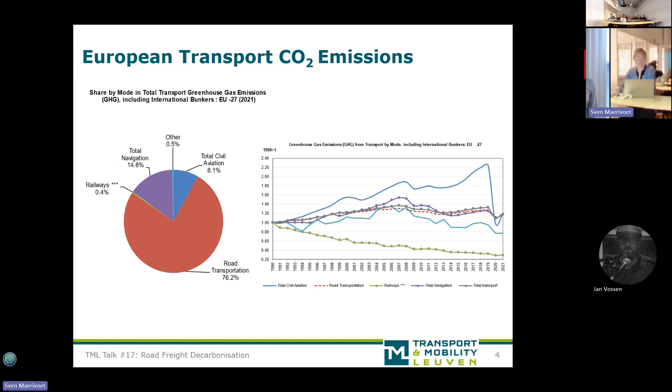What's going on policy-wise? The European Commission is trying to address the issue of mitigating climate change by implementing several policies, including one that was implemented in 2019, a heavy-duty vehicle CO2 regulation. Essentially, vehicles are being certified using a specific tool, the vehicle emission, vehicle energy consumption tool, Vecto. This regulation was only implemented in 2019, and actually there's already an update being proposed.

The initial targets were to reduce greenhouse gas emissions by 15% by 2025 and 30% by 2030. In light of new goals, and energy independency, they're already considering that revision, and it's going to be a lot more strict.

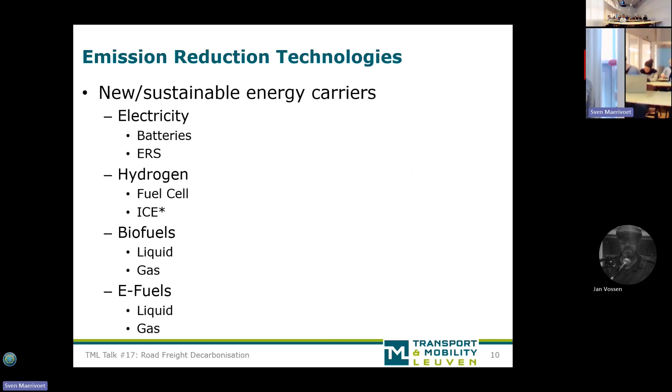What's the advantages of these battery electric vehicles? One, they're efficient. Electric engines are a lot more efficient than internal combustion engines. 70 to 80% of the primary available energy is transferred to the wheels. They're quiet, electric motors, there's very few moving parts. These engines are very quiet, which helps both the environment and the driver. There's no tailpipe emissions.

There's no fuel being combusted, so there's nothing coming out of the vehicle. And it's a relatively young technology. It's still improving. So there are vehicles on the market, but there's still quite a lot of potential to be had in improving the vehicles.

What are the downsides? These vehicles are heavy. Well, specifically the batteries are heavy. At this moment, they're heavy if they want to achieve the same operational profile as current diesel vehicles. If you want to drive them for a full day, that's around 800 kilometers. In order to achieve that, you need a battery that's around 1,000 kilowatt hours. Such a battery at current energy densities will weigh around 5.5 tons. That cuts into payloads, has an impact on the infrastructure, creates more road damage. So that's a difficult position these vehicles are in.

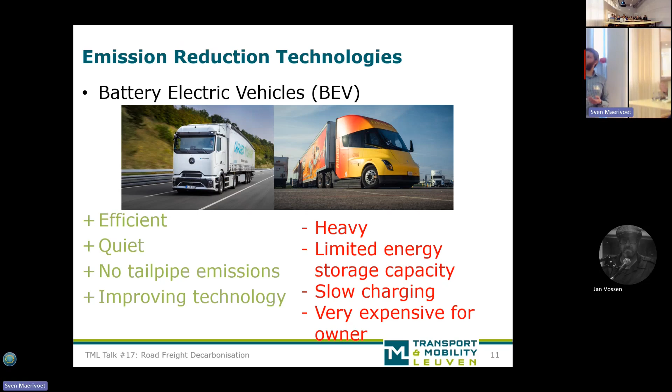Next, you have electric road systems, and there I'm already moving towards the next presentation a bit. Essentially, they have a lot of the same upsides as battery electric vehicles, in the sense that they're efficient, they're quiet, they just get their energy from the overhead power lines or from the road. There's two systems. On the left, you see one with a pantograph that needs to be installed on the vehicle. It costs about 25,000 euros to install such a system, and then it takes the energy from those power lines directly to the vehicle itself.

That means, if they're combined with a battery electric vehicle, the battery can be a lot smaller. You don't need as much. It doesn't cut into the payload as much, and it's a lot less expensive to buy such a vehicle. You can also combine it with diesel vehicles. These vehicles are actually actively being tested combined with diesel propulsion systems. So they are multi-compatible, as you would say.

What are the downsides? Of course, this needs to be installed on the road. Such a system with overhead lines costs around 1.7 to 2 million per kilometer to install on a highway. So that's expensive. Those costs need to be recovered in order to make the system economically viable. These systems are still being tested. There are trajectories in Germany and Sweden where they are actively being tested, but the reliability in all kinds of different weather circumstances is not yet proven. That's a work in progress, I would say. Doesn't mean that it's necessarily a problem, but it still needs to be tested.

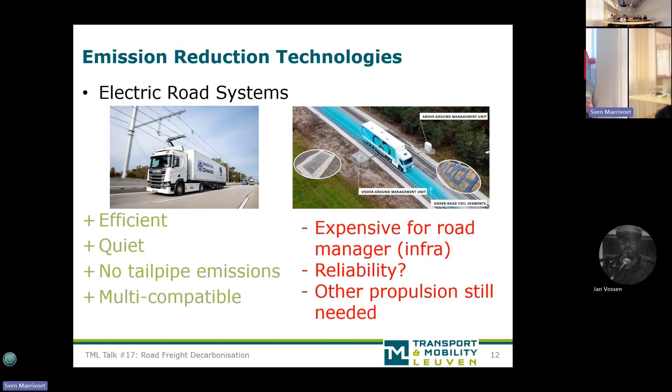And of course, you do still need these vehicles to be equipped with other propulsion systems, because you're not driving on a road with overhead cables the entire time. It does need either a battery to drive its electromotor or a diesel engine for the last mile, or to overtake, or in case a part of the charging network is not available.

Next, we go to hydrogen fuel cell. It's essentially an electromotor powered by electric energy stored in hydrogen rather than in a battery. So it's quiet, has no tailpipe emissions, and because of the much higher energy storage capacity of hydrogen, has a much longer range than battery electric vehicles.

Downsides, it's expensive. It's not as expensive as a battery electric vehicle, but still it costs quite a bit. The main downside is its energy inefficiency, I would say. As I said, a battery electric truck converts about 70% of its primary energy to power on the wheels. For hydrogen, it's around 30%. That's worse than an internal combustion engine, simply because there are so many energy conversions going on.

The primary energy needs to be converted to hydrogen, then converted back to electricity in the fuel cell, and only then can it start being used. So those are very inefficient processes that waste a lot of energy, and essentially you need 3 times as much electric energy and electric generation capacity to power these vehicles. So if one windmill is enough for a certain amount of trucks, you need three windmills to power the same amount of hydrogen vehicles.

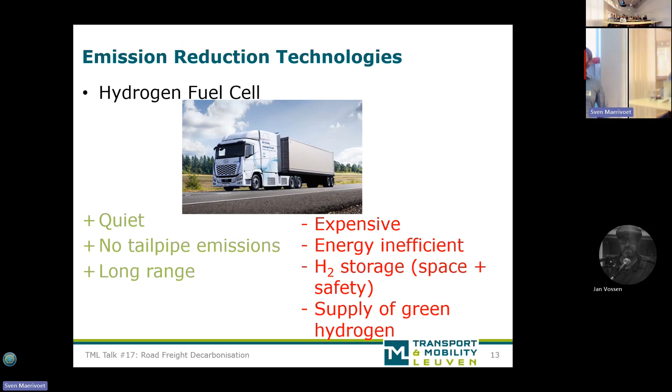And then, the supply of green hydrogen. Hydrogen can be supplied, but it's mostly done using fossil fuel as a starting point. The capacity for green hydrogen using green electricity is still very, very limited, and it remains to be seen whether there can be sufficient green hydrogen made available for an energy intensive sector such as freight transport.

Moving on to biofuels. Hydrogenated vegetable oil, biological natural gas, for example. These are essentially already available. So you do have vehicles using these fuels already. They can essentially be using the same vehicles that we have today, with certain adaptations maybe for older vehicles, but essentially this doesn't change anything. So you can use the same vehicles and you can use the same refueling infrastructure.

Downsides, well, the greenhouse gas reduction potential tends to vary, I would say. Past biofuels, in some cases, didn't reduce greenhouse gas emissions at all, considering the entire life cycle. These days, most modern biofuels do achieve greenhouse gas reductions of 50%, some even claim 90%. So there is some reduction, but you never get to net zero with these. They're more expensive to make. That's an important one. Again, as with hydrogen, is there enough organic material available to make these sustainable biofuels?

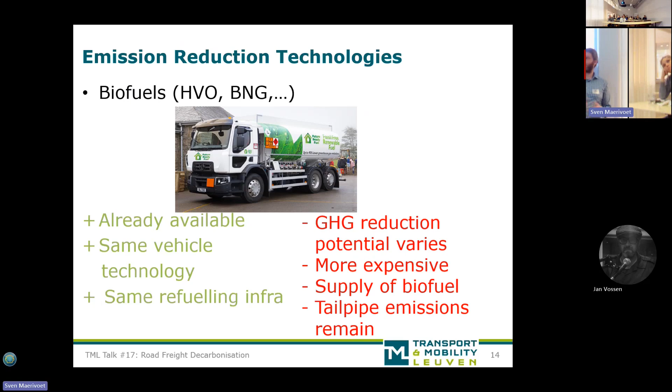And since you're still using combustion technology, you're still getting tailpipe emissions. So this is still producing NOx, this could still produce particulate matter, and that's not an issue you're solving with these.

And then e-fuels. I wasn't able to find a decent picture simply because they're still so very immature in terms of technological advance. What e-fuels are, essentially, they're synthetically recreating the fossil fuel we're using today in a more pure form, completely carbon neutral. So you use clean electricity to generate hydrogen, you take CO2 that you capture from the air, and then using additional electricity, you can make a completely carbon neutral fuel. That's the ideal situation, I would say.

Again, you're using the same vehicle technology, using the same refueling infrastructure. Problem is, this is very expensive. What they're projecting right now is that e-fuels would cost 2 to 3 times as much as classic fossil diesel. So that's going to cut into the bottom line of transport operators. It's a very young technology, so there are factories that produce e-fuels, but they're still very limited in scope, and their production capacity is still very low.

And the same downsides as biofuels: you're still using inefficient combustion with 40% thermal efficiency, and you still get all the same tailpipe emissions that you get with the diesel vehicles that you're using right now. That's the overview. That's what current technologies are to reduce carbon emissions, considering the prospects of the European Commission.

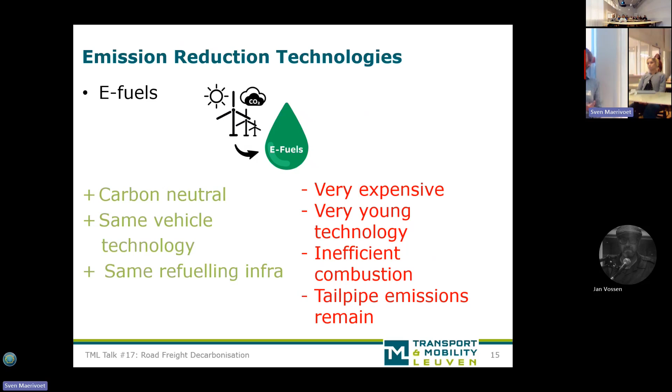So with that, I would like to conclude. Road transport is the largest European sector in which CO2 emissions are still increasing. So there's a great pressure to start getting those emissions down. Heavy freight demands high performance. So these are vehicles that are on the road a lot. They drive all the time. So you do need high performance vehicles in order to have an economically viable transport sector.

There are several reduction technologies that exist that I presented, but they are at various stages of development. So it remains to be seen which of these will be economically relevant by when. What the Commission is counting on right now are fuel cell electric vehicles, battery electric vehicles, and e-fuels. Some of these have serious downsides, and there's actually no clear solution yet. There's no way of telling right now what the optimal solution is going to be. Still a lot of technological development going on. So we're still a bit in a wait and see situation, depending on those innovations.

Considering also that it's becoming very urgent to take action and to actually get things going in line of meeting the carbon emission goals. Yeah, no clear solution yet. But maybe we're going to hear about a good solution, a clear solution, in the next presentation.

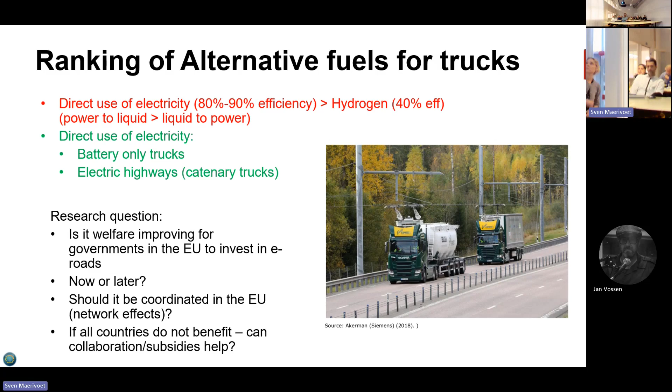Basically, I don't really have to say this because Tim was already saying this, but just a short repetition here. So the good thing with the battery trucks is that they have big batteries. So the days when they don't make these long trips, they can actually be used for vehicle to grid. So they can supply the network with electricity in daytime when electricity is more expensive, and charge during the night. And you also don't have these coordination issues. So they are sort of self-sustaining.

But then, as Tim was saying, they have this large battery, which takes up part of the payload capacity. And if it has to charge en route, that will take time. It will also be very costly, because they need contracts with these charging points. Also, it's very expensive for these firms to have drivers standing there waiting in the middle of the day, not driving. So that's going to be a large cost.

Whereas the e-road trucks, they have smaller batteries, so not that heavy, not that costly. And also they don't need recharging stops. But the problem is that this is going to be a large cost for the governments in investments, and how large, we can discuss; it's uncertain.

And then the big uncertainty these governments face now is that we don't know what the battery cost will be in the future. We don't know what the battery weight or density will be in the future. There are predictions, but we don't really know. We also don't know what the investment cost of the electric road will be, and we don't know what it will cost to maintain, particularly not in Scandinavia or Northern Europe where you have heavy winters.

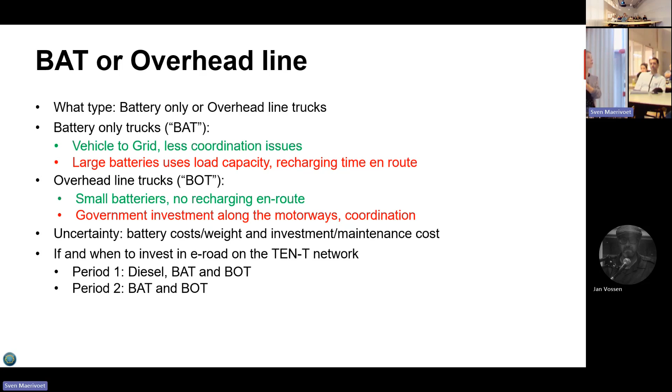So we set up this model, and now we think about the TEN-T network in Europe. So we think it's realistic, if it was electrified, that this is the network that would be electrified. And we have period one, say from now to 2035. That's if we're going to do it now, and then we assume we know the costs. Or we can say we do it in 2035, which would be period two. And in period two, we are not sure about the cost of investment, and we're not sure about the battery costs and weight. So that's the setup.

All right, so then we assume here that we have long trips and short trips. And the EU legislation says that one driver cannot drive longer than 9 hours per day. So we assume that the long trips are 9 hours. And these legislations also say that a driver can drive maximum 4.5 hours before that driver needs to take a rest of at least 30 minutes. So we say we have short trips, and they are 4.5 hours, and during that time we say the battery can last, and also there is not going to be any break because the driver can just drive.

And then we say each and every truck has a value X, and that is the share of days in a year that this truck makes a long distance trip. So we say every day the trucks make a trip, and X share of days during a year is long trips, and 1 minus X share of the days are short trips. So we have some trucks making a lot of long trips and some trucks making a lot of short trips, which is going to impact how the cost of the battery pays off.

So then this is the average yearly distance of the truck: the trip length of the short trips, the share of days making short trips, the trip length of the long trips, and the share of days it makes long trips. Then we have this battery, and we're going to optimize the battery size to determine what will be the optimal battery size for these trucks. And then we also say that we always need a 20% margin to take care of the battery. So we shouldn't be completely out of energy.

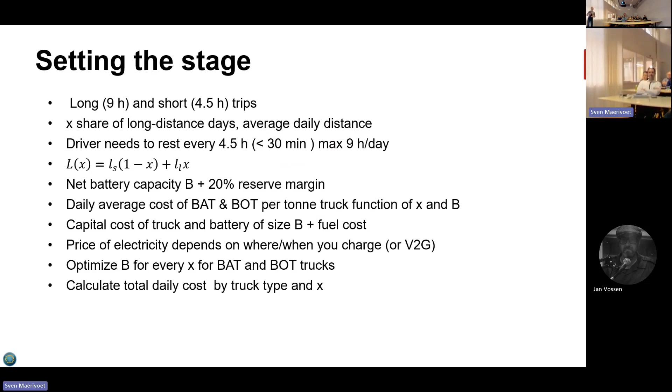All right. This is a key thing. The price of the electricity will vary depending on where you charge and also from whom. So it's always cheapest, we say, to charge at home at night. So that's one electricity price. And then if you can sell electricity to the grid, you're going to charge a higher price, because then you can do it at the moment when there is less electricity on the market for that hour. So that's going to be higher.

Then it's going to be even higher to charge while you're driving. Because as I said, these firms need to sign contracts with charging points so that they know they are not having drivers stuck waiting for capacity. And that's going to be costly. And then we have this electricity price when you're charging from the overhead lines. And there are several authors who made the assumption that the government is going to pay the investment, but they're going to charge 2 to 4% of the investment cost.

And that, they say, is going to be equal to the maintenance cost of these roads. If we go for that assumption, we have a pretty low price of electricity when you're charging from overhead lines. But it's also true that this price is going to be a lot smaller if you do this in a densely populated network, like Germany, where you have a lot of trucks that can share this maintenance cost, compared to, for instance, Sweden, where you have much fewer trucks to share this cost. So electricity prices charging from these overhead lines will be higher in Sweden than in Germany.

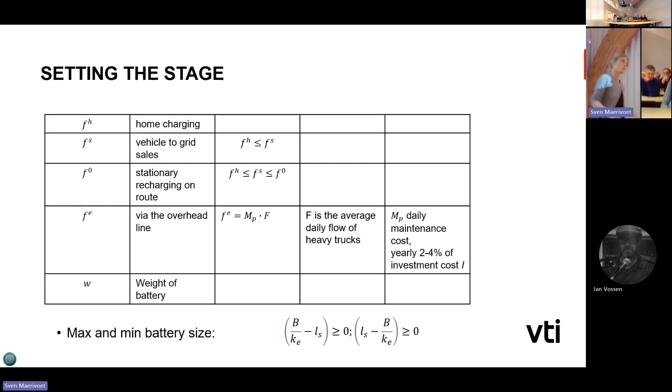Okay, so these are the equations. This is the daily cost. I will not go into these because it's a horrible equations when you're sitting in a nice lunch lecture like this. I'm just going to point out a few things.

First of all, this is the daily cost of the overhead line, the OLT truck. And this cost crucially will depend on the share of the network that is electrified, which in this equation is theta. So if you have a large network and if you're in international trips, it's going to be important that the other country also has the electric road. Otherwise this theta will be small because you cannot use the electric road in that other country. So that's going to play a big role.

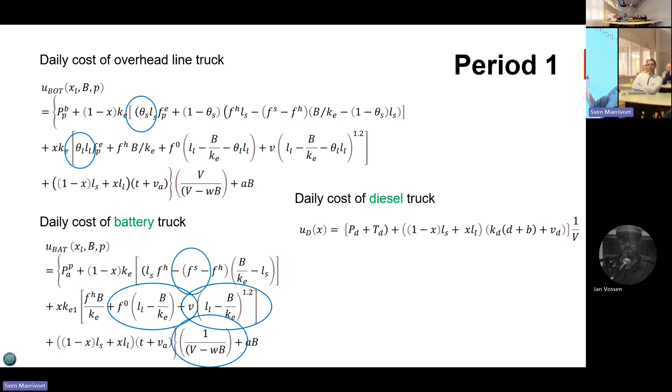And this is the cost of the battery truck. What's important here is that it will depend on the price of vehicle to grid, so what you can charge when you're not using your battery yourself but can sell the electricity. It will also depend on the size of the battery relative to the trip length. If you have a smaller battery, it means you will have to stop and charge, and that will be a costly time cost for the driver, who has to stand still and wait while the truck is charging. It's also going to be more expensive to charge because the electricity price on public charging will be larger. So this is kind of, and then we just have this old fashioned diesel.

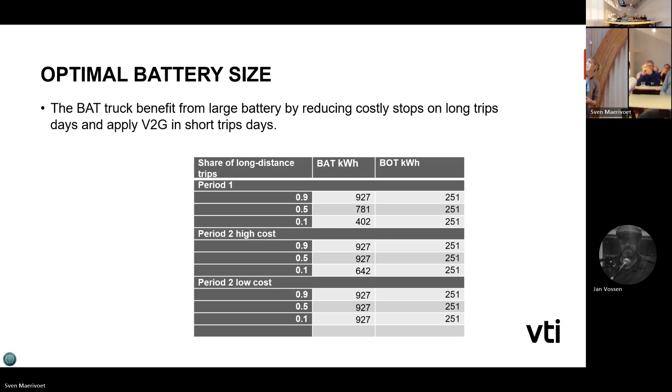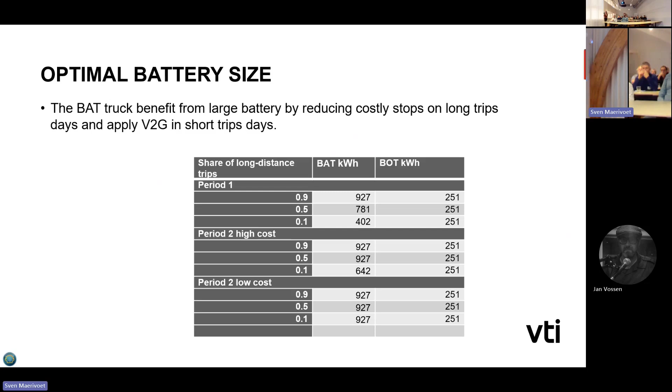All right, I think this is the results. This is first the optimal battery size. We see in the later period, when the batteries are cheaper, they will all go for the large battery, the battery trucks. Whereas the overhead line trucks will always go for smaller batteries, basically what they need just to cover the distance not covered by the overhead line network. But you see in the first period, it's only trucks making mostly long trips that will have large batteries, while trucks making a lot of short trips will have much smaller batteries, even though they can use the battery for vehicle to grid.

Here diesel is already so expensive because... Yeah, because of the fuel price. The fuel price. Because long distance trucks, as opposed to, for instance, cars or light trucks, use a lot of fuel. So this is basically why the diesel is expensive.

And this is already taking into account that the infrastructure has been built, or? Yes, so here we assume that the infrastructure is already built. And maybe this is why we don't see so many battery or overhead line trucks yet. It's maybe unreliable, but also they don't know for sure where to charge.

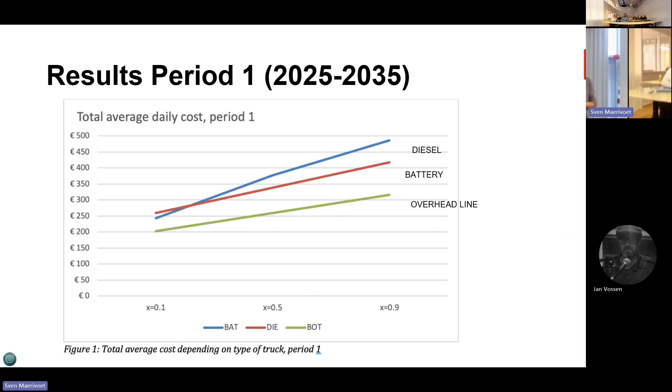And this is the result of period 2. In this period, as I said, we have 2 scenarios. One scenario is cheaper, lighter batteries, and higher investment and maintenance cost of the E-road. Then the opposite scenario, where battery cost and weight is higher, and the maintenance and investment cost of the E-road is lower. So those are the 2 extremes.

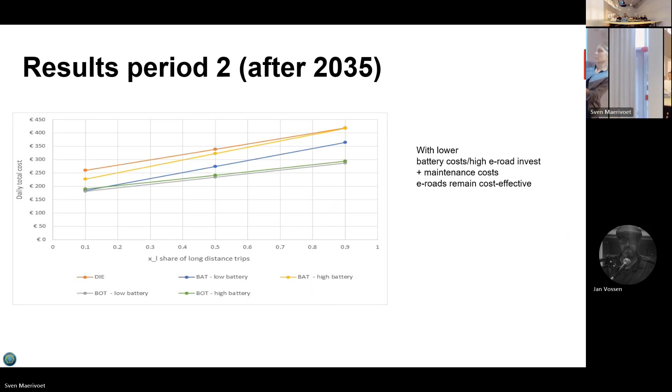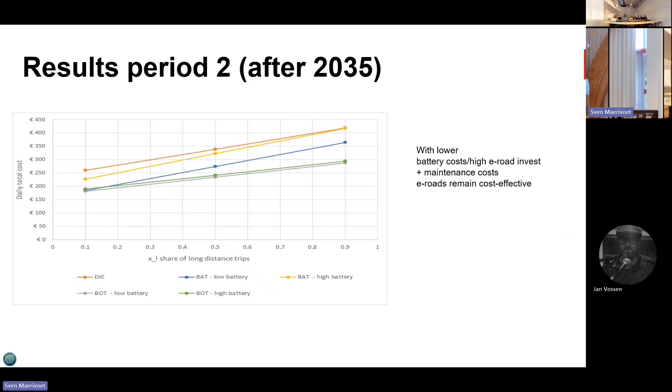And here you still see, in these green lines... this is the BOT truck, and you see it doesn't really matter whether the daily cost of the battery is high or low, because the batteries are so small. But it's still lower cost in both scenarios than in these battery-only trucks.

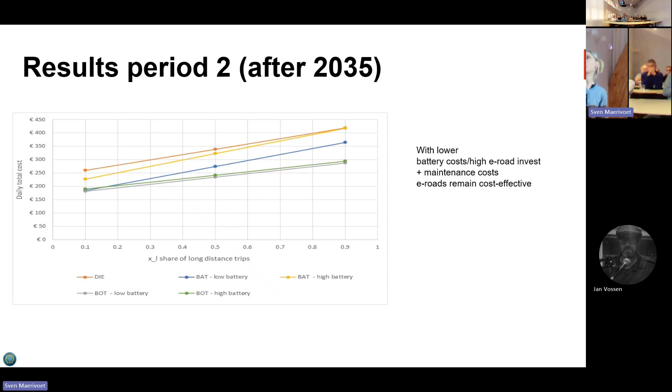Here, the blue and yellow lines are a little further apart, because battery cost plays a bigger role for these box trucks. So even in both scenarios, it's cheaper for the truck companies to have electric road trucks in both cases. And in all cases, diesel in period 2 is also more expensive. So even if battery development is slow, and here we've taken really, really slow scenarios from McKinsey and PIAC and similar assessments, it seems like it's going to be more expensive to have the diesel truck in period 2, which is good news.

So here is a simple cost-benefit analysis of building the E-road in the first period and in the second period. One scenario has a high cost of electric road, another a low cost of electric road. You see that in all scenarios, it's a positive net benefit-cost ratio. We've taken the daily cost and made a discount for every day over the year, assuming the E-road can work for 10 years, with a 4% discount rate and marginal cost of public funds if we use public money to invest. All the details are in the paper, so I won't go through them here. But even taking into account this large cost for governments, it's a positive net cost-benefit ratio in both period 1 and period 2, even in the scenario where batteries are cheap and electric roads are costly.

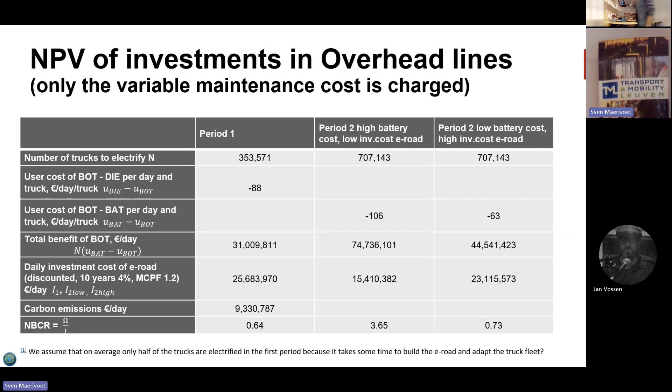So you were right, I was surprised. I thought it was a bad idea, but I was wrong.

I don't have much time left, do I? No. All right, that's what I thought.

Okay, I'm not going to say a lot about this, so to make a long story short: let's say now we've treated the European Union as one country, sharing all the roads in the TEN-T system where there's high or low volume of traffic. But let's say this is actually down to member states, and then we've taken what we think are two pretty extreme cases.

We have Germany, which is high density and quite low share of international traffic because they are like a big country. And then we've taken Sweden, which has low volume of long distances, low volume per road kilometer of heavy trucks, and also a very high share of international traffic because we're a small country trading a lot.

So then we ask the question, would Germany benefit from Sweden investing in this road? Because if Germany would benefit from Sweden investing in it, then maybe Germany could subsidize Sweden. And then we find out that Germany's probably not going to benefit from this either, because it just doesn't make any sense for Sweden.